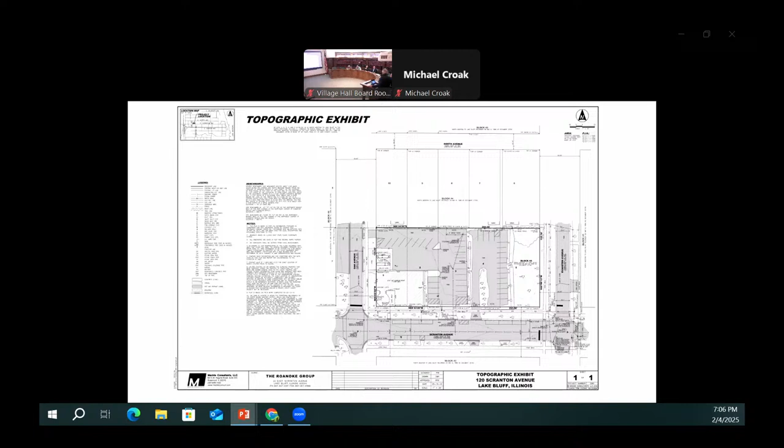Okay, all right, perfect. Thanks again for allowing us to present the project. We've got the comments back from our last meeting when we were together in the workshop, and I thought there was a lot of constructive things, and we really reviewed a lot of those ideas and incorporated most of them into the plans. We also went back in front of the Plan Commission and spent a fair amount of time on the site, in terms of logistics of the car ramp, the pedestrian. This is the old plan, how the sidewalk works; we looked at numerous different options in terms of how that might change and increase the safety of it.

The last thing we've done is sent all the information to Teska, and they're reviewing the knuckle at the corner, which may get modified slightly because it doesn't line up with the other knuckle on the west side. You can see those two don't align. So this is what we have at the moment. We're going to wait for the recommendations from Teska and probably incorporate those into the design.

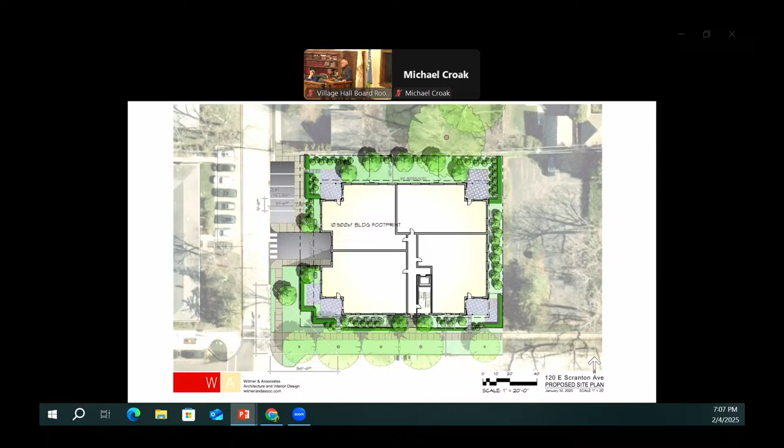The landscape plan has been refined in terms of the corners and some of the sight lines coming out of the ramp, making sure there aren't barriers to sight, and how pedestrians cross at the crossing toward the road. Then basically landscaping the corners and the privacy of the outdoor spaces from the individual units, incorporating those areas on the four corners.

We're going to try to keep the parkway trees that are there. They're in great locations and in pretty good shape. All the other trees are really not in great shape, and there aren't many of them. If they do get damaged during construction, we will replace them with additional trees.

You can go to the next slide. This is just a landscape plan which calls out all the species of all the plants around the project.

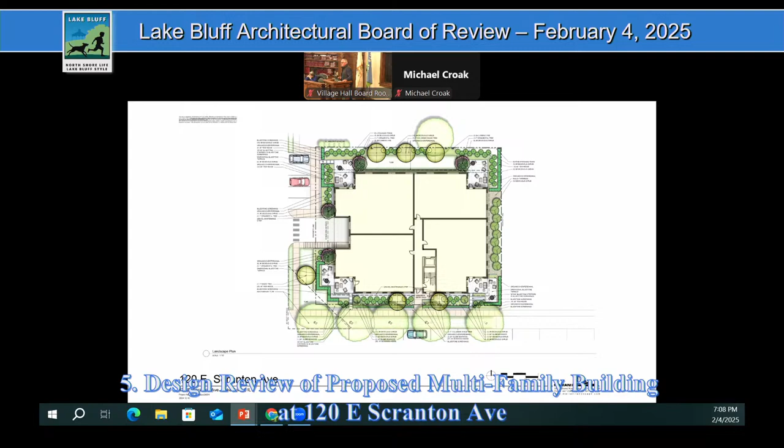The next slide. We have the option to have some at-grade generators, and two of the units are going to be at grade, on either side of the ramp. You can see on the right how the plan is and where their location would be, and they'd be screened with landscape. They would be for two of the units in the lower level. In the top floor, the generators would be hidden by the parapet on the roof. But we wanted to have that option just so we had locations for those. So that's what this shows.

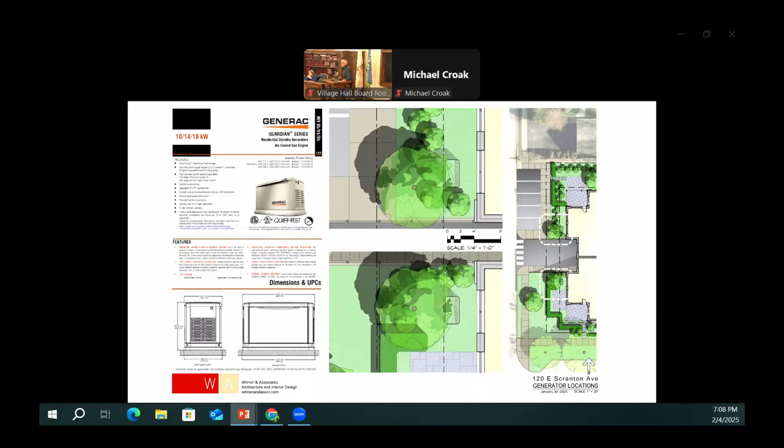The next slide. The floor plan really hasn't changed much. This is the basement spaces, and then the first floor units, of which there are four, with the corner porches. You can go to the next slide.

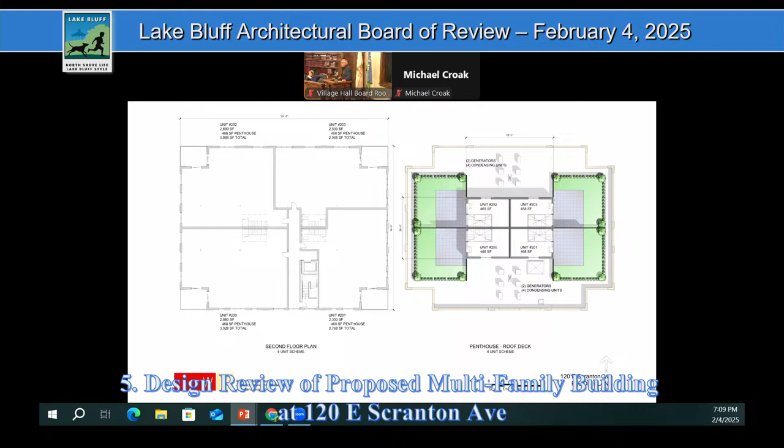And then the upper units, four units, with the upper penthouses to access the outside space on the roof, on the four different units on the second floor.

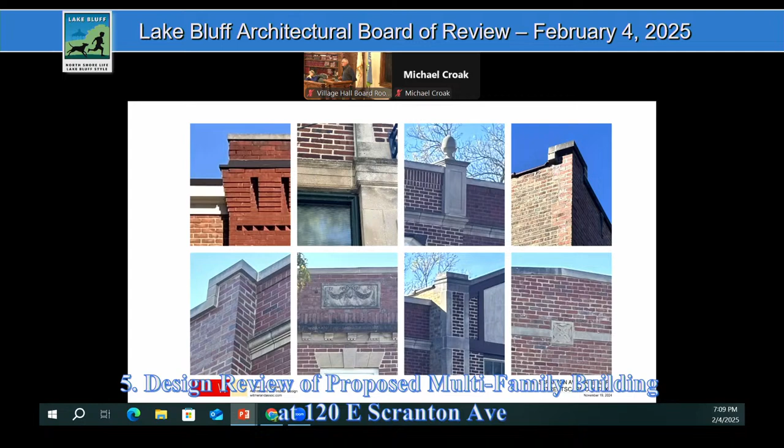Again, this is just the same slide that we had. Really, our detailing looked at buildings in Lake Bluff and other buildings of the same vintage for its detailing. So what we did here was show what we had and then showed where we are now. The three or four images above are what we originally presented, and what we're proposing is down below.

So you can see the cornice has a soldier course and then another rowlock underneath it, relieved at the top edge of the building to give a little more detail. We talked about the piers being pulled out. You can see the heads of the windows have been enlarged to 1.5 bricks high to give them a better scale.

The porches, we can talk about this a little bit. We had some discussion about screening in the porches, and what really came to light is that it's a really important element to people buying these units, the screened-in piece of it, as it has been historically in Lake Bluff. So we'd like to keep the screened-in porches.

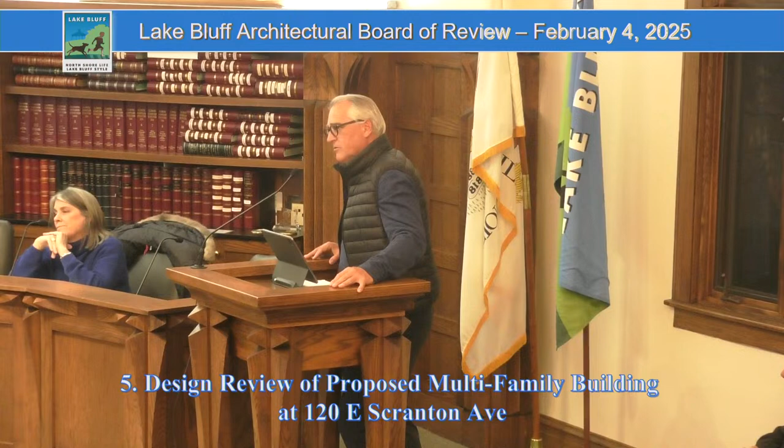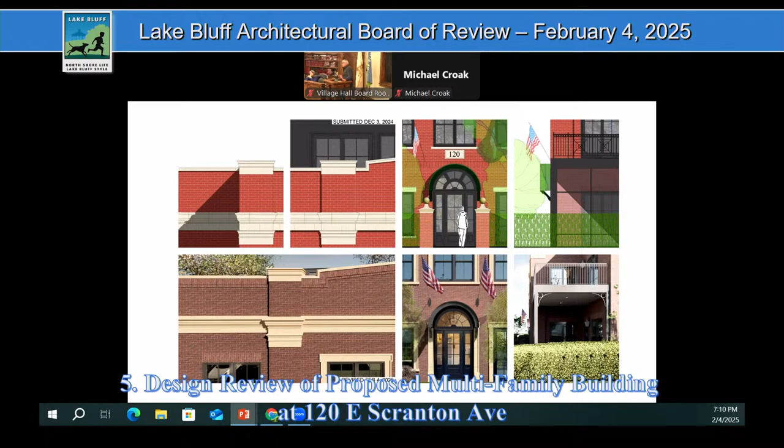We've added the details of the bracketing at the corners of the posts, which would stay on the outside with the screens going on the inside. We looked at different options in terms of retractability. Really, one issue is they're very large, and two, getting them tight and up and down. So we really feel like we'd like to have a copper screen, divided. I'll show you another picture. We can go to the next level.

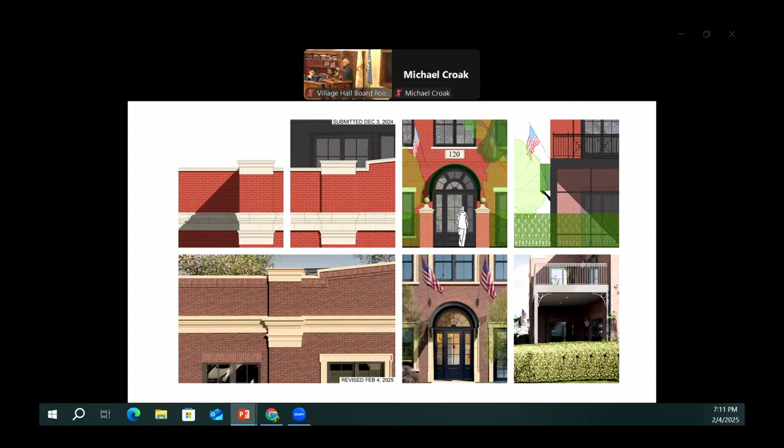One of the things we keep showing is American flags in front of the building. Our thought is that would be for 4th of July, Memorial Day, those sorts of things, so they wouldn't be permanent, just a place to put them. I think that's appropriate, because if we had them permanent, they'd need to be lighted, which creates a whole bunch of issues with lighting up interior space that we didn't think made much sense.

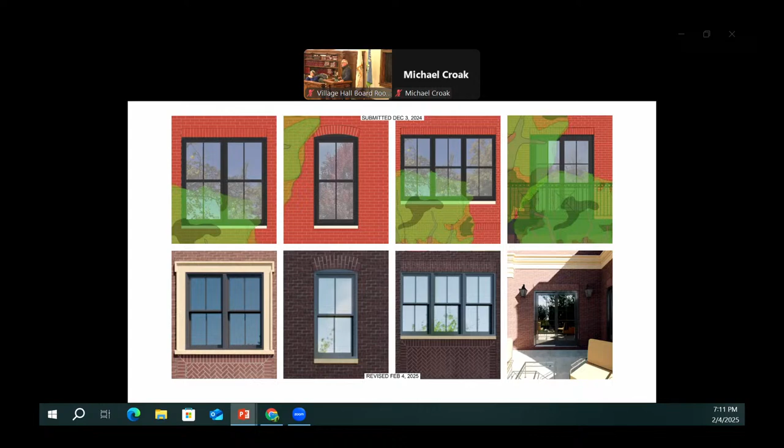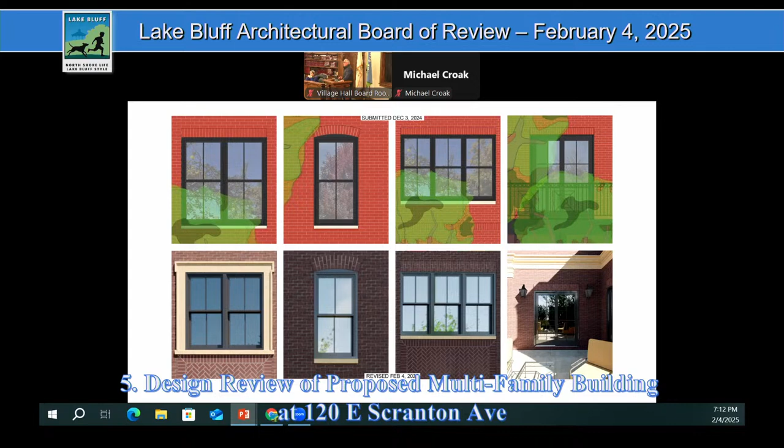This slide shows the window detailing, the enlarging of the brick details in some of the windows, and the center bays really having the limestone go around on all sides of the window, as you can see on the left slide. Below the window, we have a herringbone pattern that lines up below, and you can see those in the two different examples there.

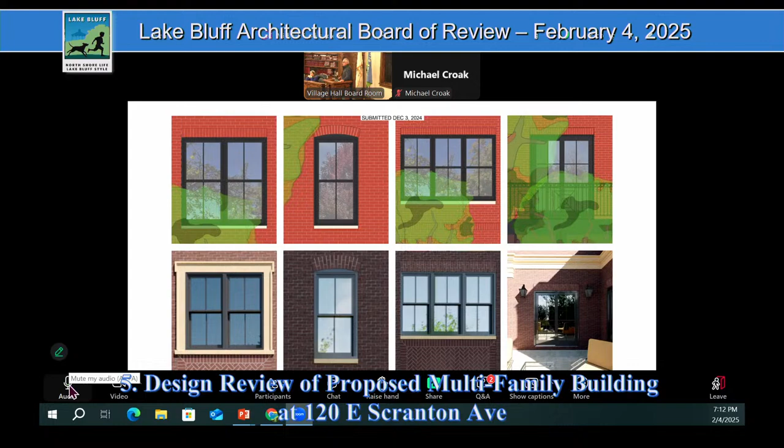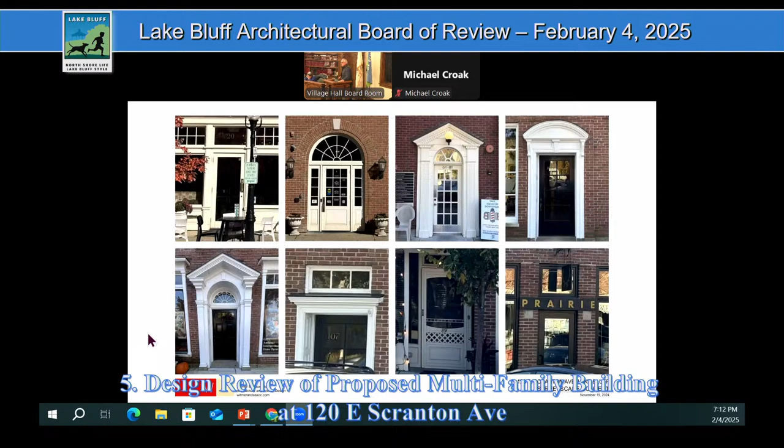And then the porch, you can see the coach lights, and we have those in the lighting. I'll show you the samples of the coach lights that we have on the exterior porches in the lighting plan. This is just one to show the examples of around town that we were really looking at and drawing from, and again, the entrance sequence and the idea of the detailing of that.

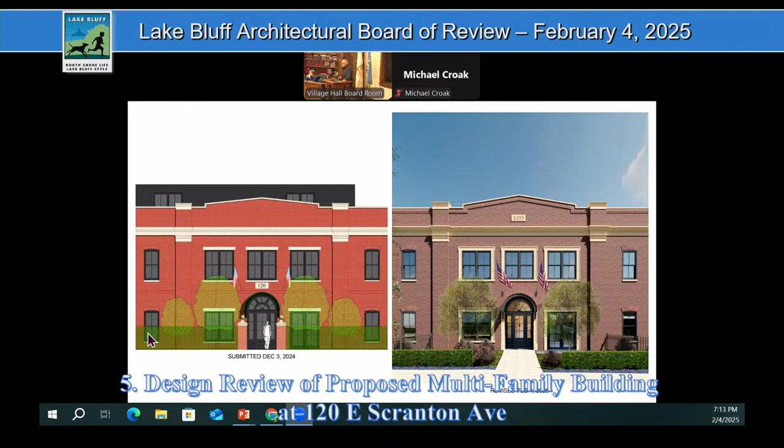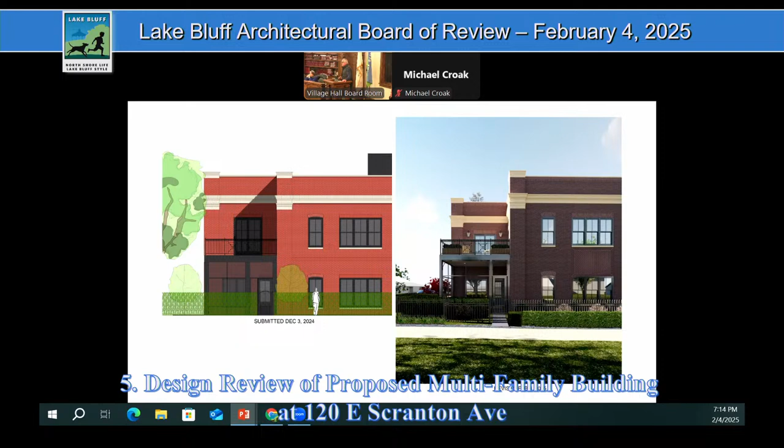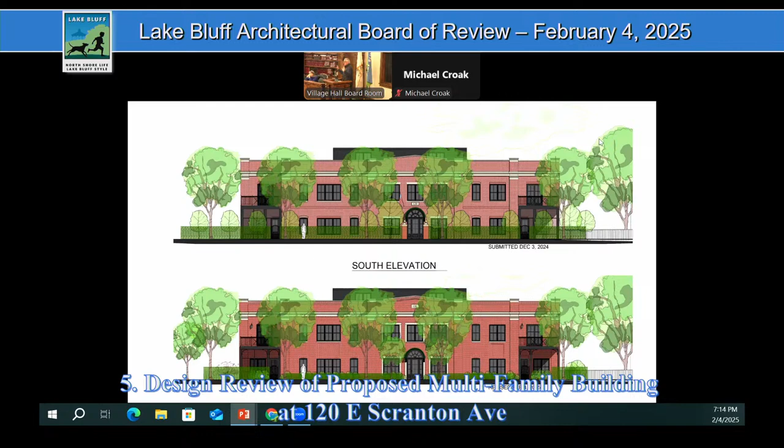Next one. So then elevations, the front elevation — this is the entire elevation so you can see it is all one piece. You can see how the center portion is now bumped out, with the limestone detail, or cast stone detailing, around the windows, and then the edges. You can see the panels of brick underneath the two sides with a herringbone pattern, the details around that, and then the cornice heads. It's hard to pick, so I showed the details first, and then you can see these elevations, because you really lose it at this scale. It's hard to see, but I think you get the appreciation. I think it was brought up before that when you're on that sidewalk, you're close enough to see those details, so you really will pick those up, which would be important.

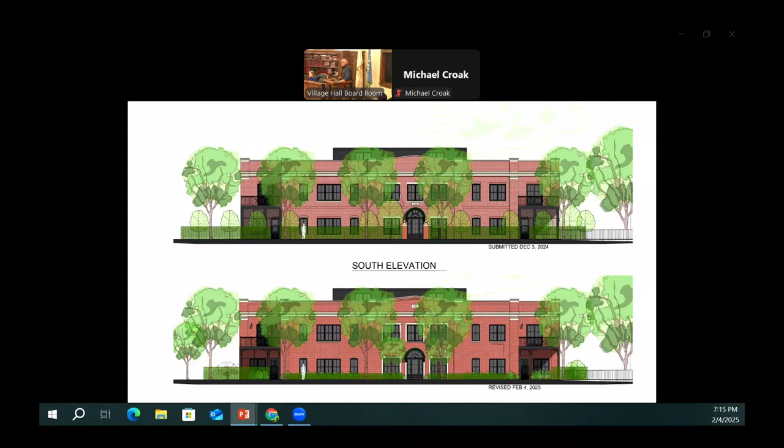Drew, could you check with Tim in the back? I'm getting a message from our Zoom people that the audio is off. Okay, great, thank you. Sorry — should I start over? No, I think you're good. Okay, that's all right, happy to. So we can get to the next one. That's the south elevation. Oops, I clicked on the wrong thing. I guess I'm not — there we go.

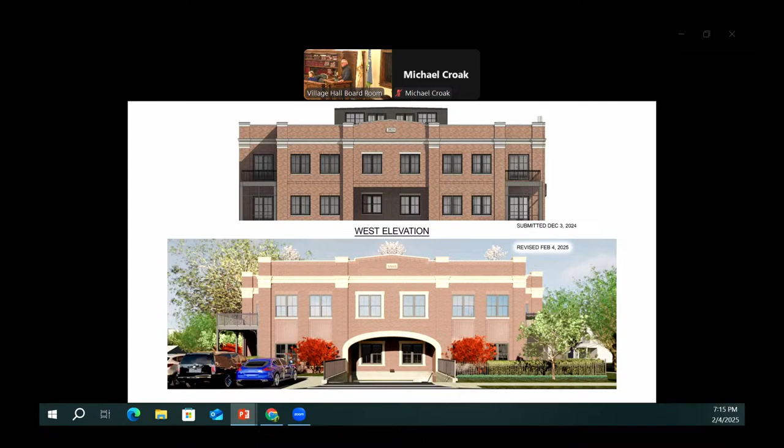All right, so this is the west elevation. I thought the comment about trying to arch and basically have cast stone going around the entrance into the lower level really made a big difference in terms of how that looks. I thought that was a really big improvement.

Again, in the center bay, we have the stone surrounds around the windows. This just shows how the parking works, and the sidewalks and railings, which come out and make people walk out and slow down, and bikes slow down going across that. We did study the ramp quite a bit ourselves, looking at it. We've done this in 5 other buildings that we've done in Lake Forest in a similar kind of situation.

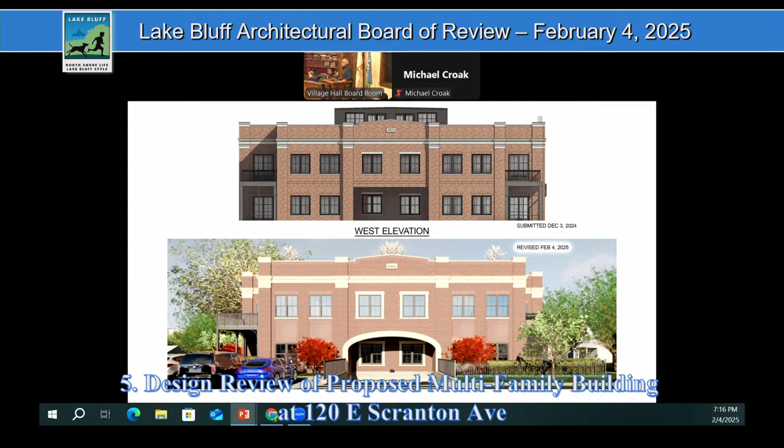This is relatively common in Highland Park, with a fair amount of underground garages and residential that's similar. This would be the first building like this in Lake Bluff, but it's pretty common elsewhere. The slopes are similar to what we have in Lake Forest, so we're pretty familiar with how that would work.

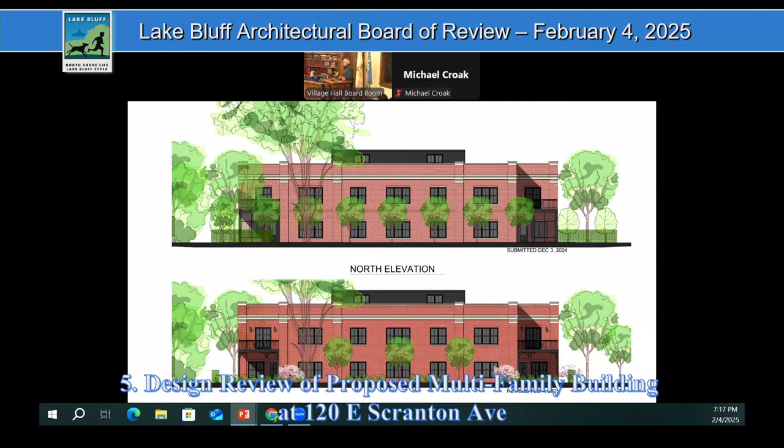On the north elevation, it's pretty much the same all the way around. The only thing I don't think is correct is the light fixtures that shine on the upper terraces, because they're clear. We have a different light fixture we're using on the roof, which doesn't show the bulb, so it's hidden and wouldn't project into the neighbors to the north or to the east.

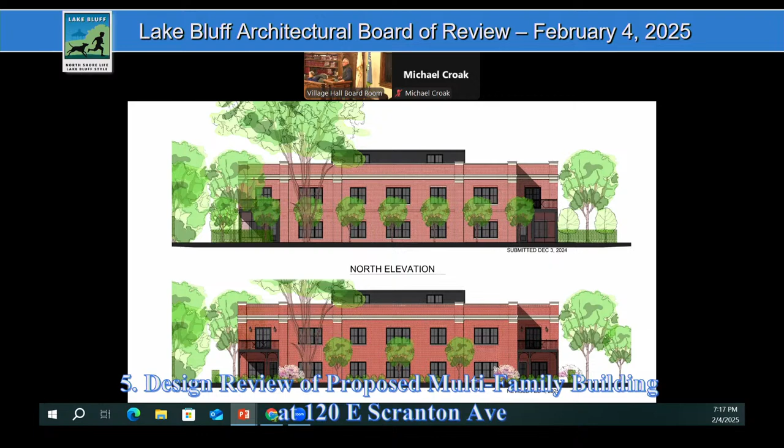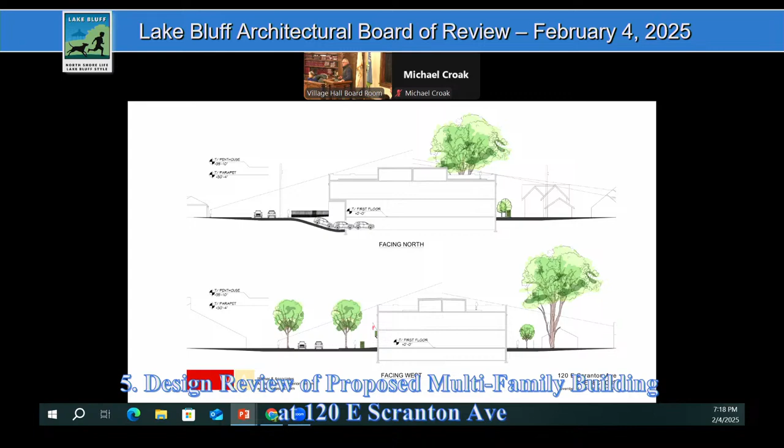This is the same as we have; we haven't really changed our section in terms of building heights. I want to show you that the penthouses are really inconceivable, or invisible, from the street, with the view being cut off. And this shows how the ramp works, how we get through that.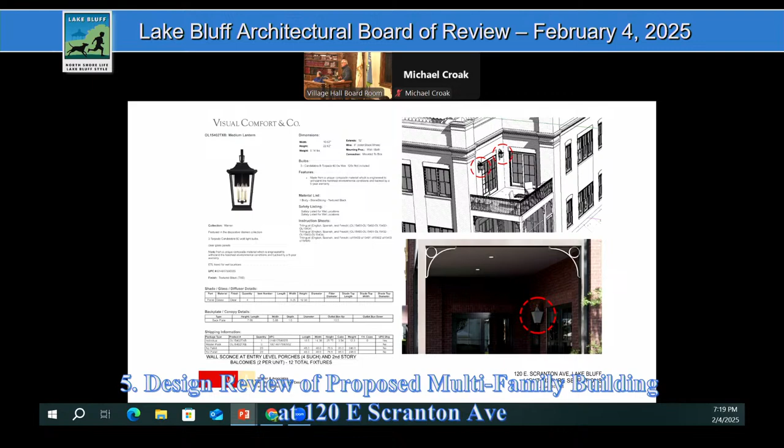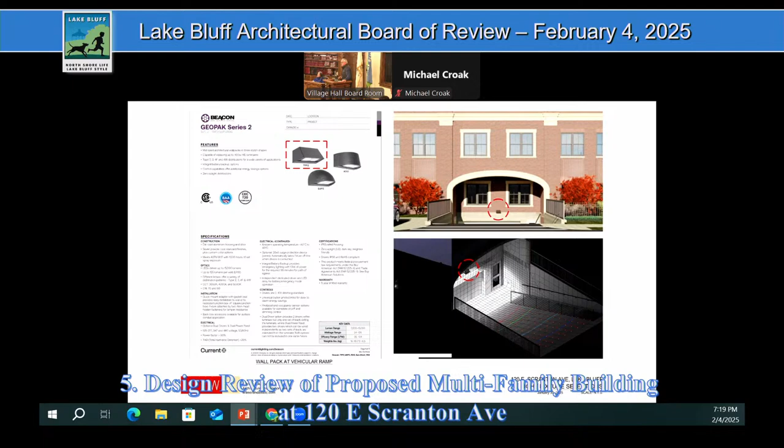This is very direct—we're concerned not just about spill down to the ramp, but also about the two windows above, which will most likely be bedrooms in the units themselves. So we're really concerned about light spread there, and this shows how it shines down at the ramp. That's a more generic looking fixture. Then we have some recessed cans to light up the entrance and over the porches, just to give a bit more light for safety when negotiating the front door and inside the porches.

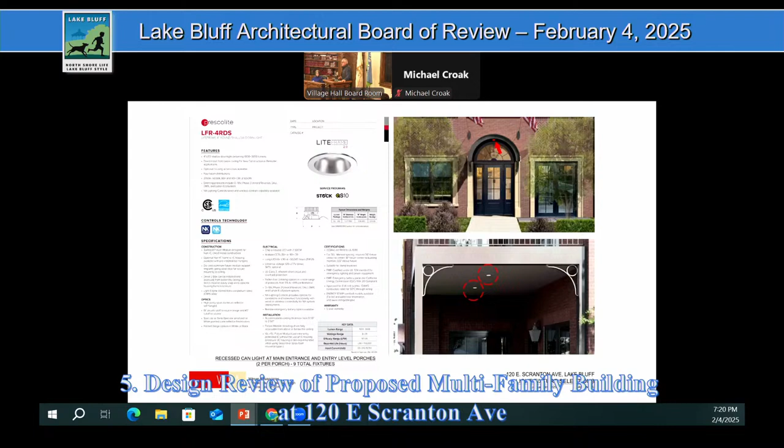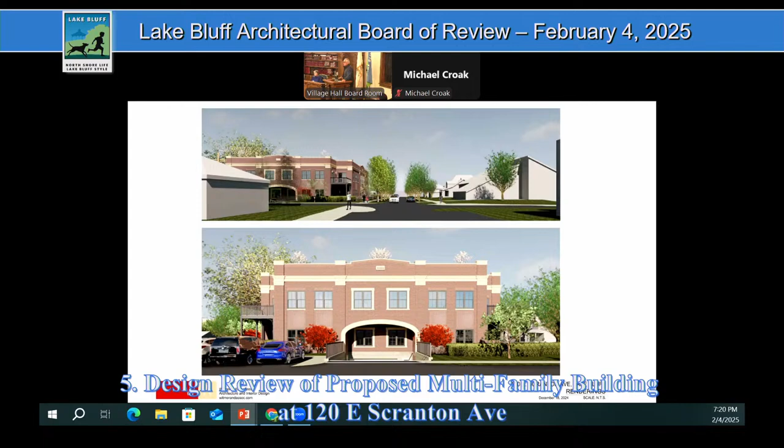These are some additional perspectives from the corner. I think there might be one more—this is actually an earlier rendering. We didn't have the landscape yet, but I thought it was good to give a visual on that. Then the last slide we have is materials.

The first one is, what do they call it, midnight soot—Hardie board, smooth-sided. That will be on the penthouses. I wasn't able to get a sample; they couldn't get it to me in time, it's supposed to be here tomorrow unfortunately. But I think everyone knows what Hardie board looks like, it's basically a dark piece.

I missed that—there's one on this side, that's for the penthouses, the window clad. We talked about having a, trying to get a not-black window.

And we were able to find what we liked for that, which is called midnight bronze, which is just a little off black. But I think it gives a little depth, which is a little different.

You know, this is not probably a great place to see color, but you can pass that around. And then I have two other samples, which is our face brick, which we have a hand molded looking brick, red, and then our cast stone, which would be like stone details around the building, which is really the limestone color for that. So those are the two.

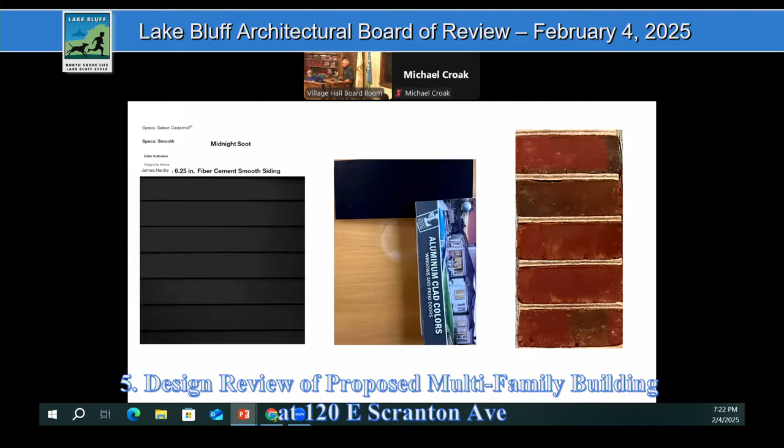I think that's it for my presentation. Happy to answer any questions, or? Oh, you think? Absolutely. Let's start with you.

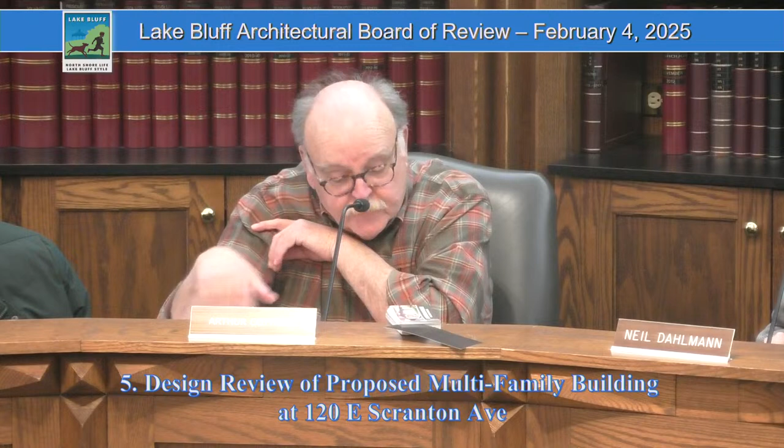A couple of things - I think what you're showing us now looks better than what you showed us previously in terms of the detailing and so forth. Basically, I have three concerns. I still feel that this is kind of out of character, if the idea is to be a transition from downtown to the residential properties, this falls short.

But having said that, the driveway down is really quite large. I mean it's two-way traffic plus the man door. Could it not be just vehicles and not pedestrian? In other words, move the emergency exit somewhere else, or that would make it 4 foot less in width?

The issue is where would it go? Well, if you look at it, then you'd have an area well, and it really needs to be on that end, so it would take up a fair amount of landscape on that space. Well, effectively, you could just move it slightly to the south.

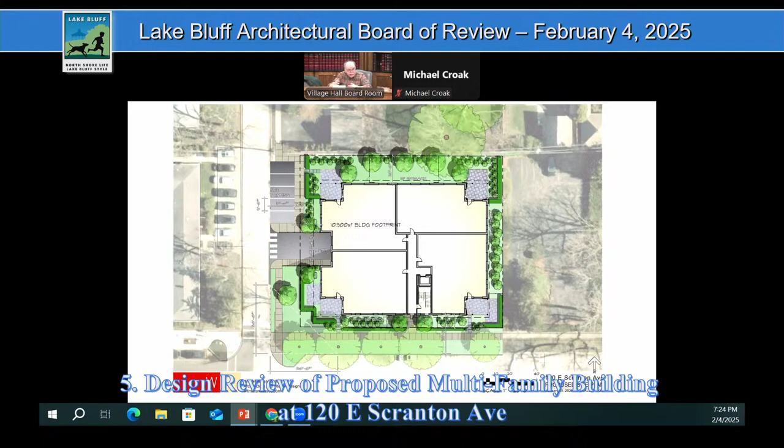In other words, you're going to have a wall on the garage, and you could have just enough soil for a planting bed, and then the stairwell. That would be one thought immediately comes to my mind. It's a pretty decent run. So that stair, if you look at it, let's see, let me pull up.

Can you pull up the basement plan? Let's just look at that a second. Sure. Because it's tight to get it in with - it's the landscape plan. There we go.

Right, but - basically, if I could interrupt you. Sure. Basically, what I'm saying is, you take the stair you have designed, move it, say, 36 inches south, so that on each side of the stair you have a wall, and it's separated from the door. Therefore, that archway and so forth can just go over the driveway and doesn't have to include the space for the man door.

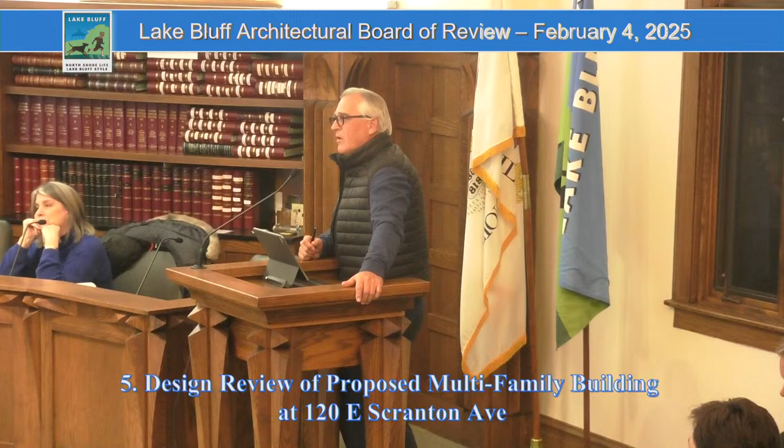I'm just wondering if that would look better. I'm happy to look at that, and I understand where you're coming from, and I hate to have that hold up the whole thing, but it's a little tricky because the arch has to be in the center of the building.

The whole arch, because it's such a symmetrical elevation - I understand, so that we'll have to move that around, and I just have to see the headroom of where that arch is. Wouldn't the overhead door want to be centered on the parking?

It isn't the parking - yeah, no, that's what I'm saying. All that has to stay centered, so we want to come in both sides equal. Actually, we have a little play with the door location. At any rate, that would be one thought - somehow make it smaller.

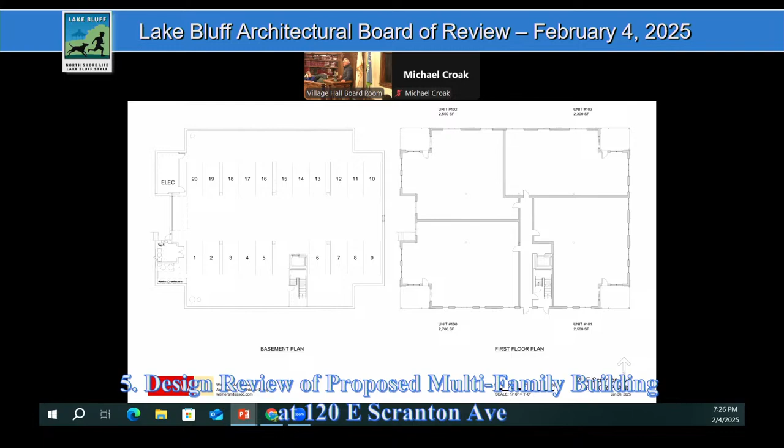And I'm making an assumption that you feel you've got to have two-way traffic. You know, that would be another possible solution, and it is really tight to be two-way, but what we found is, one, it's safer. Most people drive down the center of it and go up and down that way. And when somebody's coming - I live in the building in McKinley, so I drive it every day.

And I've driven it for 4 years, so I have a pretty good feeling for what people do. When somebody comes out of the top and the garage door is open, obviously somebody's coming out, you stop and let that person go. But you can be going by each other at the top edge, so you kind of have to keep it that wide, just to be safe, is what we've found.

Then the other question I had is just the overall height of the building. Now, you had a slide up there that showed - but in our packet and so forth, there's no indication of actually from grade to the top of the parapet. On that, yeah, and then that, let me just pull that up.

So, from grade to the parapet is 35 foot 4 inches. And then to the top of the penthouse is 35.10.

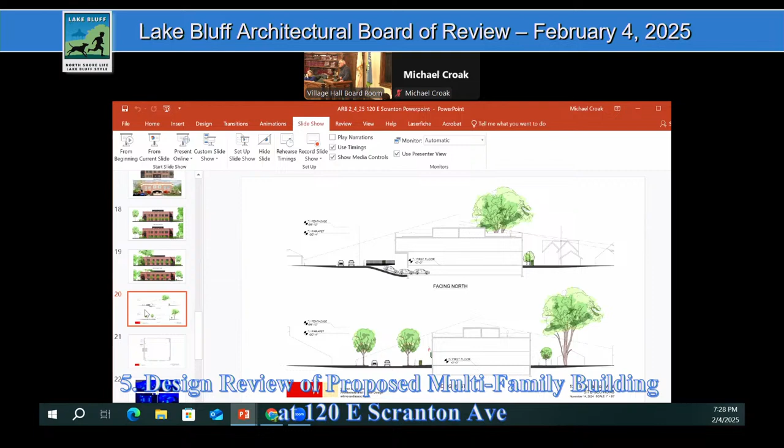If I understood what you said at the previous meeting, it's just the penthouse that you're seeking a height variation for? No, the 4 inches is a variation too, because it's 35 feet. So the variations that we got through the Planning Commission Zoning Board of Appeals has also included the 4 inches of the parapet. You'd say, well, why do you need the 4 inches? Well, it's the difference of having a 9-foot ceiling in your space underneath all the ductwork and everything, or an 8-foot ceiling.

It was a pretty big difference. And, you know, because we're occupying the roof, the parapet extends above the roof deck, doesn't it? Yeah, but it's our guardrail, so that has to be 3 foot 4 inches high for a guardrail. Right, but you could put a guardrail, I'm looking at the roof plan. And you put a guardrail around that paving you've got up there. We had some discussions with... okay, but let me finish my point.

Let me think. How tall are the buildings on the south side of Scranton? Does anybody know? On the south side, the library? No, the buildings that you're showing, this is where we're taking our design cues from. Those buildings, how tall are they? They're pretty, I don't know. We didn't measure them. You're talking about the Bluffington building.

Because the one across the street, or is it the Lawrence Interiors one, or any of those? The same building, right. My only thought is that the building gets built and you're standing on the corner and you look at that building and then turn around and look at Bluffington's and say, God, that building is a lot taller than Bluffington's. I'm just wondering whether it would be or not. I don't think it's probably any taller. Well, that's just my guess.

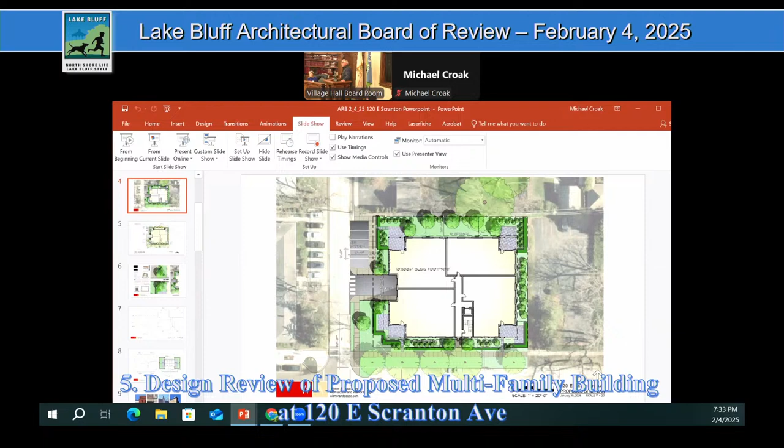So we try to customize those outdoor spaces because they're really important to people, and that's one of the really nice things about the project. If we had someone who absolutely wanted a sidewalk, we could have the flexibility. I think it makes the most sense for it to come out to the west as opposed to coming out to Scranton, to the south.

The other question I had on the site plan, maybe this is in the basement, is where's the trash dumpster? The trash dumpsters are in the basement in a trash storage area. It works better than I would have thought. They back the trash truck down the ramp, pull it out and flip it in, and they have recycling.

In some of the buildings we have a bigger dumpster. In other ones that are smaller, we just have individual trash cans on rollers that come out, because with so few units there's not a ton of it. But the trash is inside for that.

I'm looking at the garage plan, and I'm wondering, are you planning on electric car chargers? There's two things with that now. The insurance people limit the electric chargers in a condominium building to a trickle charge. You can't have a supercharger. We do have circuits for 110 outlets for all the electric cars, but we can't put in a 240 charger because of insurance.

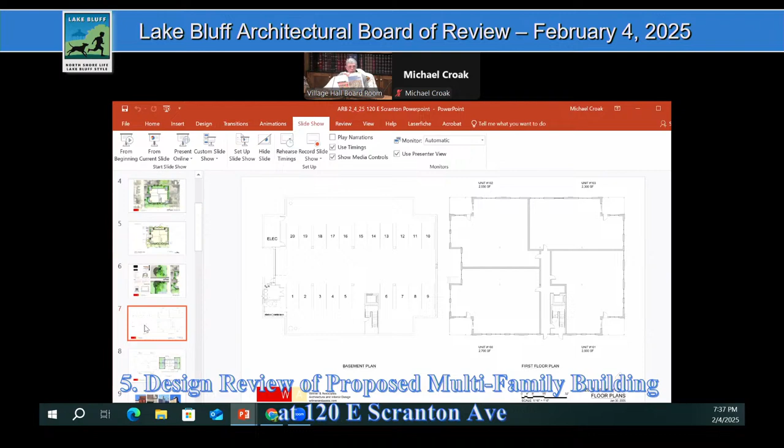I'm looking at this drawing, and I like that brick color, which is not quite that one. It's closer than the red. Yes, it's a lot closer. Let me see what else I had. Same thing on the brick color.

I think that's pretty well all I had. Most of my comments are geared towards this since we used to have a company that managed condominiums, so I'm familiar with some of these issues that come up. That's why I'm looking at some of the details we've had problems with on buildings. It's been helpful that we've now done five or six buildings, and one's been operating, I've been living there, so that helps because people aren't really too shy about complaining about different things we could do better.

For the most part, it's been pretty good. The landscaping between the sidewalk edge and the boxwood or yews, having enough space to put granite shavings so the salt goes there. In Regents Row we planted 4 different ground covers and grass, just because it's too harsh an environment for something to grow. Learning about that, I think it's been good because we've always learned something.

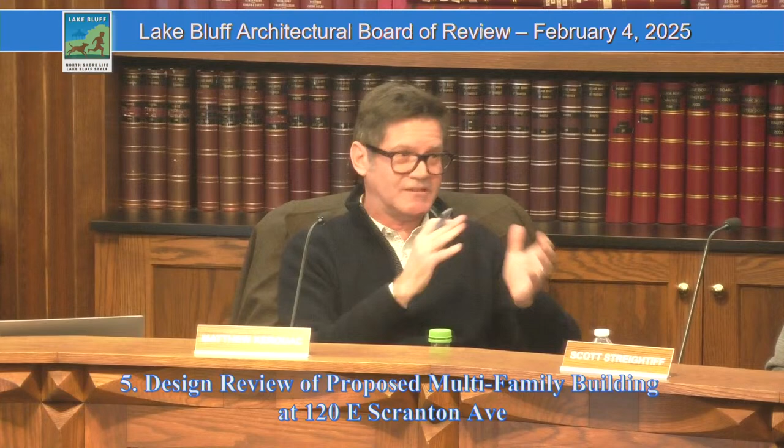It just feels like it's missing. If they were like cast stone wrap columns and this cool stone kind of balustrades and all that, I think that's one thing, like a nice big statement, but they're very kind of, I find them kind of weak statements for such an important corner of the building. I get the carve out to kind of open up, but then you fill it with something I think doesn't have the same level of integrity as the rest of the building.

And then I know you're trying to break up the run of windows and kind of that articulation by doing a little bit different brickwork. You have like an arch lintel, then a straight, and then you ended up doing like a picture frame with a herringbone. Again, if we could maybe bring that more instead of just applying a couple little decorative things to kind of make up for just this long run of brick.

And even the way the sills kind of just terminate at the ends of the window instead of articulating a little bit more beyond, just give it some level of, it just feels very severe for, if you see all those other details in these little buildings as we look at them, there's a lot of detail for these little buildings, and you have little detail for a big building.

And it's my concern that in 3 years from now we may feel that we missed an opportunity to make an amazing statement for Lake Bluff, instead of one that I feel doesn't quite get there. And if it's a budget issue, I can't fight budgets, and I know you can't fight budgets, and I know that's a main driver. If it's an aesthetical choice, then that's my kind of reply to the aesthetics, and that's subjective, and that's just wanted to state my piece.

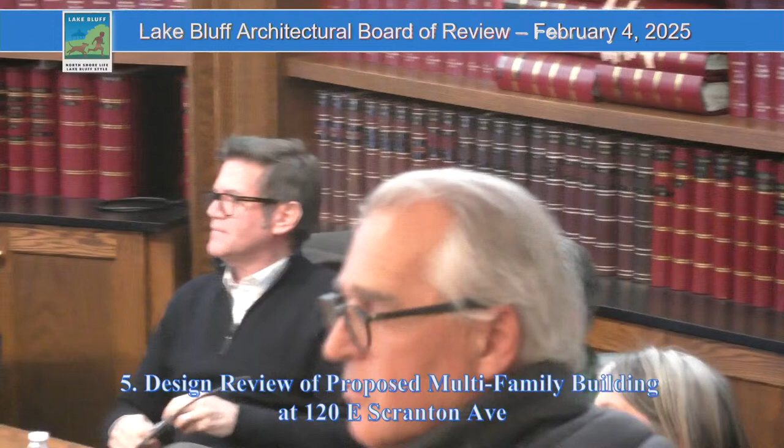Mike, can you show that up on the screen? Sure, the porches, yep.

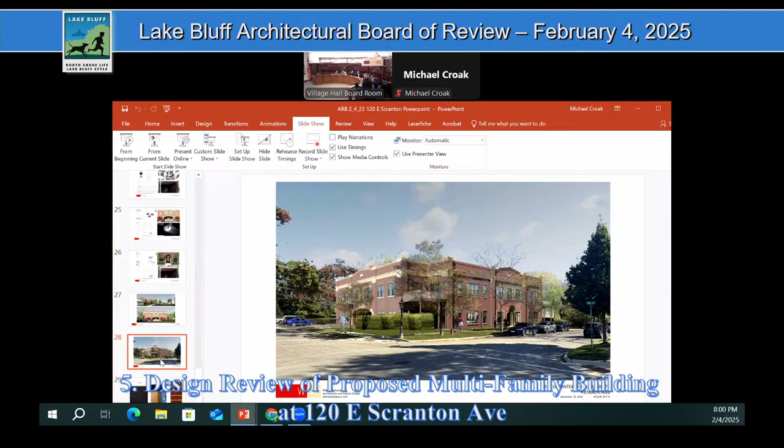The southwest porch is what everybody's going to see. The other thing is maybe that's an opportunity to make it a little more screened, because I know you're doing it with the landscaping, but those 3D renders might show that sidewalk. I feel like people sitting out there might feel exposed, though the landscaping really helps—when you're on that porch sitting down, you won't be able to see the street. But this landscaping is probably not as accurate as the other ones. The idea is that you're pretty private off of that. We have that same sort of relationship in McKinley too, where you have a pretty high hedgerow that screens the spaces below.

I don't know, I just think the idea of maybe exploring a couple different options for those corners would be worth it. And I don't think the stone idea was bad either. I love the idea of making even creating that darker statement—it's always great, because it might blend away a little bit but still capture something. I'm sure you'll find something great.

The stone is not only initially expensive, so we're going to trade the one arch for one porch. But I mean, I think the money is well spent at the front door. And kind of historically, that makes sense to me—people put ornate things around their front door, more expensive materials, and show off that.

So would it be wrong to do the front two porches more blown out and the two back porches more simple? Or would people be like, no way, we don't want the bad porch, you know what I mean?

I'd like to come up with a solution because there's really three of them - the two on the west elevation are pretty prominent. So you've got three, then you have one. Why would you do just one bad one? I'd like a solution that economically makes sense and is consistent, because there's something nice about the building being relatively consistent on all elevations, since you see it pretty prominently from all different sides.

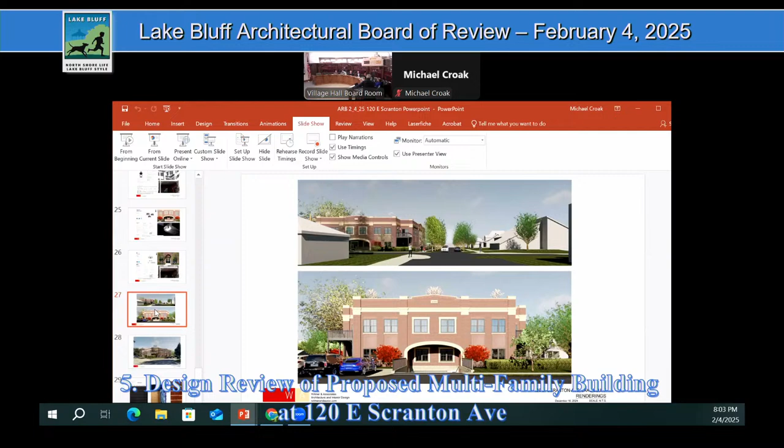Okay, and then secondly, is that front door locked or how does that work? My question was, does there need to be a vestibule? So when you go inside, there's actually a vestibule to get into the elevator beyond that. But more important, what about the mailman or Amazon person - where do they leave the packages? Inside the vestibule, inside the building. So they can open up that very first door?

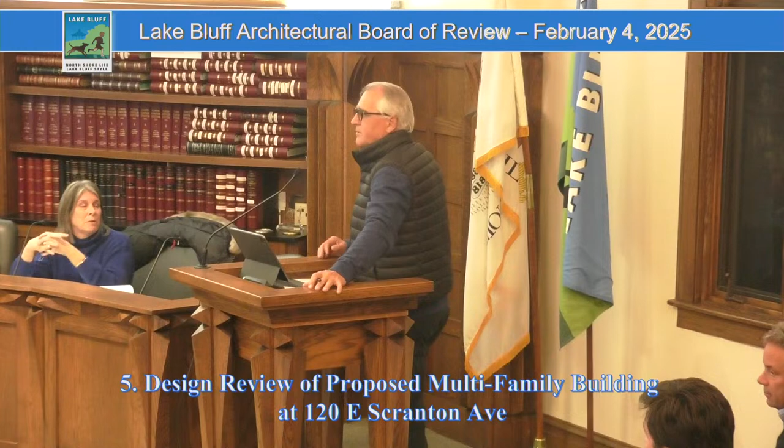Yeah, typically we have that on an electronic locking system. After 10 o'clock at night it locks on the outside, and you have a fob to get into that door, but at night it locks. Beyond that, when you get in there, you have a call system - you can call whoever it is and they buzz you in. We don't have it where the Amazon packages sit on the porch. I was imagining there'd be a stack of Amazon packages out on the sidewalk, but that doesn't happen - it's all inside.

The only other thing I was wondering about was, up on the roof, there's those generators and condenser units - are those loud, or how are the neighbors going to feel about that? The heat pump system is basically a compressor that runs outside, which now is really quiet, and the backup generators are now insulated and everything, so it's really more of an issue for the people when you're outside on the deck than it would be for the neighbors. The other thing is there's a solid parapet wall around that which hides it and also bounces the sound off.

So we really haven't had an issue with that. Your neighbor's condenser is way closer to you than this would be. And is it the same thing for the two on the street? Yeah, same thing - and those are emergency backup generators, so they're only going to run for 10 minutes on a test day, and then when the power's out. So nobody's going to complain about that? Again, they're next to the commercial space across the street, not residential.

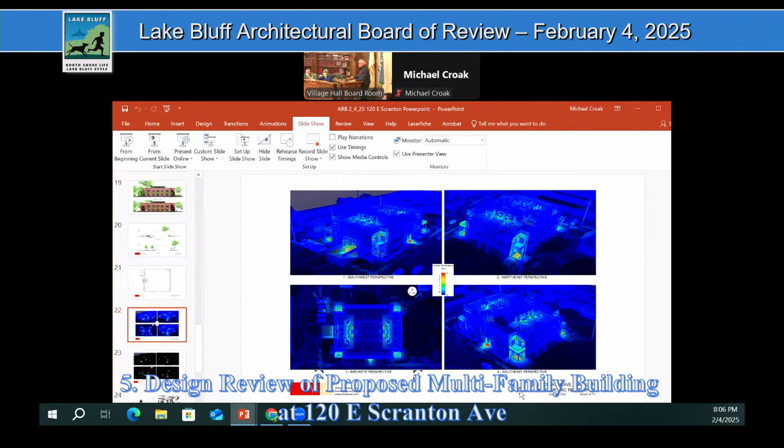What is the dimension to the top of the parapet wall? Do you have that? 30 foot 4 inches, or 30-something over feet, whatever the code says.

And what is the Bluffington's building height? It's pretty close, I don't want to say because I don't know, but it's got to be right up there. I mean, I don't think they're going to be - they're obviously different scale and different pieces, built at different times, but they are compatible.

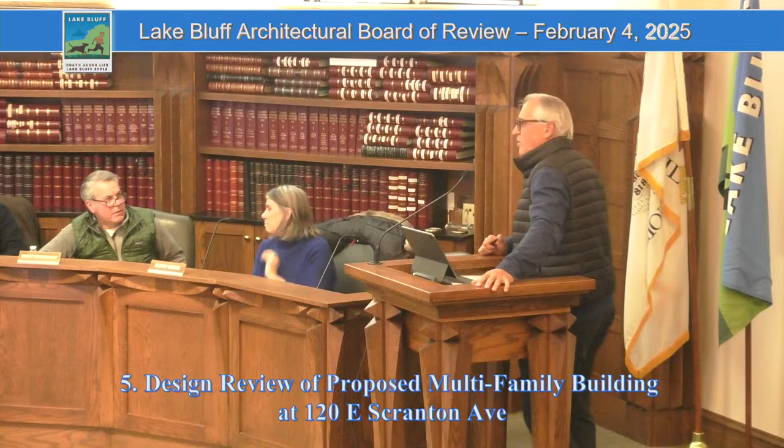You're going to have 10-foot ceilings? Yes, in most of the areas, but where our ductwork, sprinklers, and transfer sanitary are, we have 9 foot - that's our minimum. We have 8-foot doors, and that's really important to us. When you're spending this kind of money, it's important. I think that's why people say, oh, that's silly, you could take 4 inches out - well, you want your 4 inches inside the space, it's kind of a big deal. People say 9-foot ceilings but you have 8'8", doesn't sound so good.

You guys done? Well, I had one more thing. You've had a lot of work - she's Columboing him. I'm sorry, one more thing. Next time we let her go. All right, I think I am now finished. Okay, all right, it's my turn then.

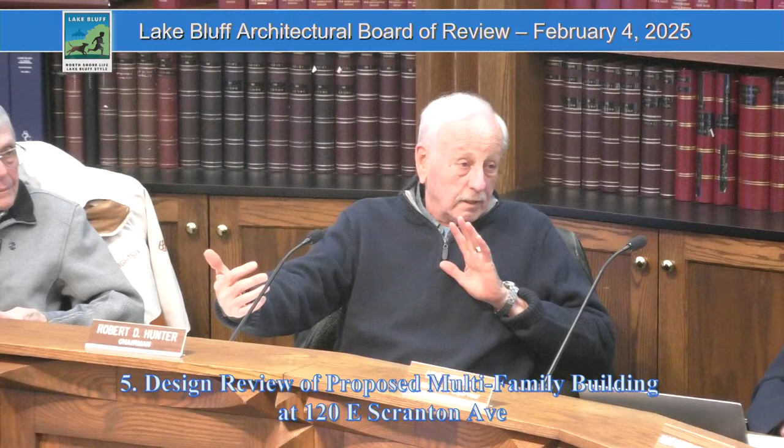Let me go back in time a little bit. First of all, we keep thinking of this, or you keep saying this is a transition piece - it's really not, the next piece is the transition piece. This is 110 or 115 feet, whatever that dimension is, till you get to Evanston, and whatever happens there is more of a transition than this is. When Peter was here the first time, the only time, you described this as more of a background building and not a statement building. And it's a little more of a statement now because of what we asked you to do.

Those are just kind of general comments. So there's a lot of talk about the arch in the drive, and yeah, that's a different geometry than any place else. Everybody's got some issues with it, and I'm looking at the drawing, and you've got the little roof thing going on all 4 sides. Maybe you do that, repeat that shape down there, just a thought, and do it out of brick. But then the bigger question is - can you show that, and Bob, could you explain that?

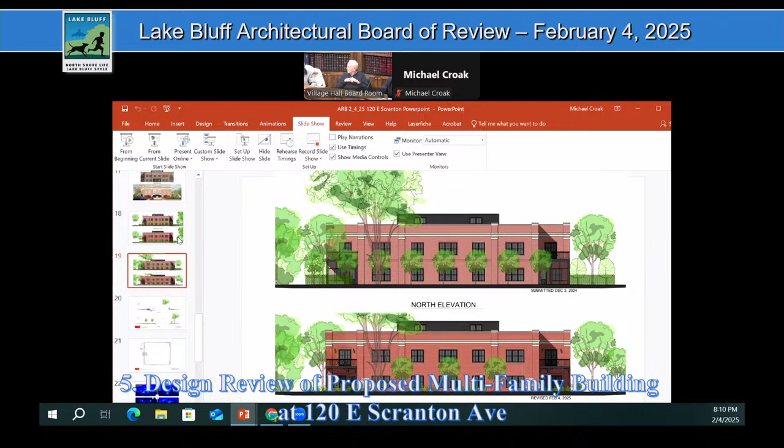Go back to that one, Mike - just the garage elevation. Yeah, I'm sorry, you don't have it on all 4 sides, just on 2, the shape on the very top parapet, right where it just raises up, and that's kind of an echo of one of the buildings. If you pick that shape up and just kind of did it again instead of the arch, only do it with brick rowlock and whatever, and get rid of the stone like everybody's talked about. My other question, though, relating to that, is it necessary to have a man door there at all?

For egress out of the basement, we need two ways out. And so if we don't do it there... we looked at having an area well out the back, but then you're coming out in the middle of the yards, and then you've got a snow plow issue and all that. Okay, that's enough, you're right.

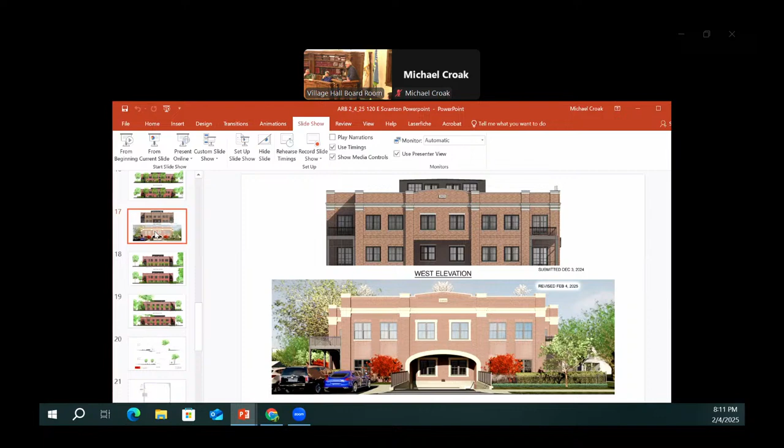The one thing I would look at too is, I don't know if I'd lose the arch shape. I think if it just wasn't stone, if it was just brick detail on the road, that'd be kind of a cool detail. Just not the stone, because the stone makes it might as well be neon.

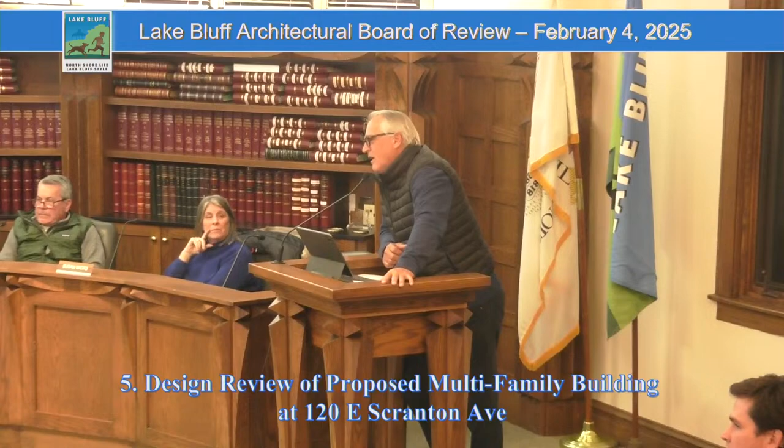And that idea of, we can't slip it in between the two pilasters, if it were to get narrower, like Art was talking about, and we could get it within those two pilasters, then it would integrate better. It's just like it didn't fit. Right, and it didn't fit.

But we're responding to a board of people telling us what to do, so I think we have to look at it again. I'm not sure, but we'd definitely look at having it like a pediment underneath, though I'm not sure how that'd work - it'd be like an inverse pediment, and that might be kind of peculiar. But the idea of having the arch span, historically it makes sense, it's working, it's doing something. So that's kind of where I was going with that, but we'll study it and look at it and see what makes sense. If we can meet next week.

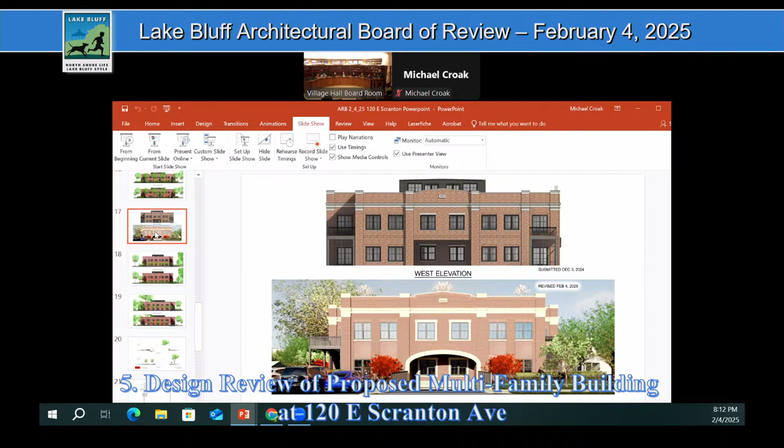One last quick question, if I could, Bob, if you're finished - I don't mean to interrupt. Go ahead.

What I want to go back and say is that the brick detailing you've done, which we asked you to do, is very important. I'm remembering - I know you've been to Cranbrook - and you walk by Eliel Saarinen's, I think it's the common building of the dining hall, and he's playing with brick. He's got to be giggling when he's doing it, because he goes from miniature brick to big brick to different patterns.

Well, the one thing I think is, you know, a bunch of comments like it's our old school. Well, yeah, it is, because those were 1920s buildings built basically in the same style and with the same idea that we were doing. So Gorton Center - Gorton is sort of the school, right? So I do think it fits in.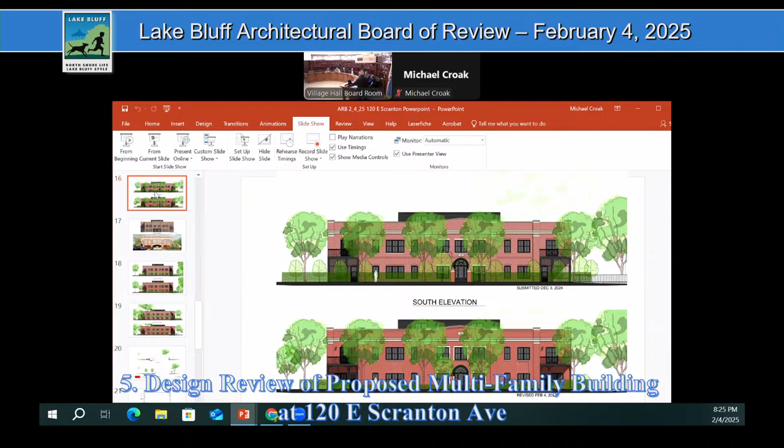Well, you pretty well said the motion, so moved. Okay, Neil made the motion. I second. Neil's ad hoc motion on, you made all the motions today. Yeah, I'm in a motion mode. Okay, so roll call.

Member Wicks, aye. Member Stradiff, aye. Member Fairwex, aye. Member Dahlman, aye. Member Cottrell, aye. And Chair Hunter, aye. Okay, motion passes.

Thank you, Pete. Yeah, thanks. We're thankful for everybody's excitement. No comments, I appreciate it. It's gonna be great, it's gonna be great.

Okay, now if we want to tackle the letter. Yeah, okay. I was a little bit confused about exactly what it was talking about.

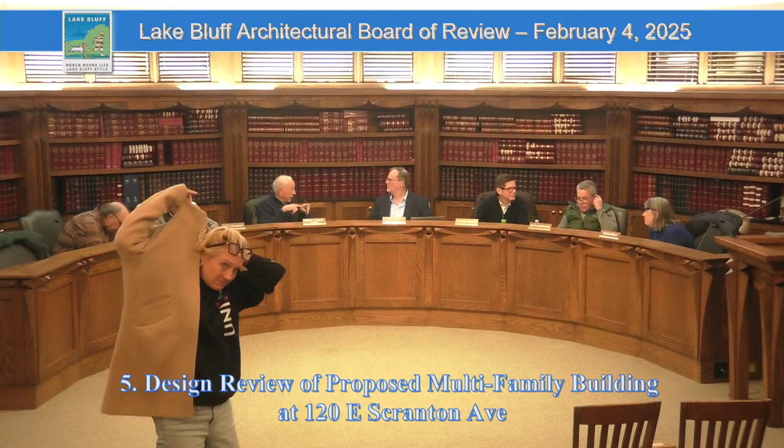I don't know if you had a conversation with him. No, I didn't, I didn't really talk to him except for the back and forth email. Right, I thought that was pretty well done, both us and him.

Do we know what the rendering, what did she say, hang on a minute, she's talking about a survey. Was there? You know, my only thought was that maybe she was talking about the different comp plan discussions or something like that. And we've also talked about missing middle housing, not for this specific site, but for other areas around downtown. There's definitely been some communications about missing middle or comp plans or something like that, maybe that's what she's talking about.

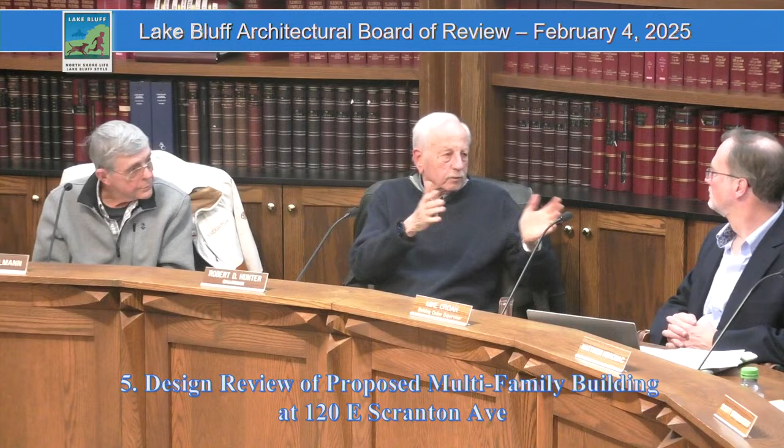Yeah, but I don't know if it was a formal board thing downstairs about the missing middle. And what you do at Block 3, missing middle, it really had nothing to do with affordable housing, it was the kind of housing we don't have much of anymore. Right, what there was is being torn down, so. You know, it's Armor Woods. But I thought one thought was, could be Block 3 if you made the numbers work.

But making those $300,000 condos, which you just can't, it's just not tall enough to do that. I think that was the discussion at one point, and then everybody said there's just no way. Is there such a thing as a $300,000 condo?

Come to Kankakee, Kankakee, we have tons of them. If it's in a 40-year-old building, yeah, but there's not many brand new condos. All these new things you're seeing are rentals. Yeah, right, for sure, I understand, I also understand that as well.

But soon there will be condos. Well, there's one in Highland Park right across the street from my office that they're selling for 2 to 3 million, the penthouses are 5 million. They're sold out, they won't be occupied for about another 6 months. Is that the new contemporary one? They're all sold. That's not this the project we're talking about, is it? Optima, is it all sold? Not part, but the Optima ones down on Sheridan Road, Green Bay, all glass boxes, they're gone.

She says, number 3.3, the renderings in the packet are an absolute non-starter for us and are entirely different from, here's a question I have, from what was originally shown to us when this discussion started.

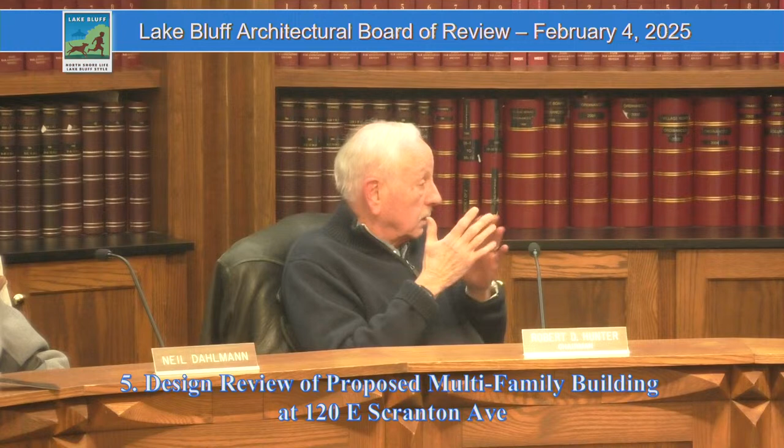And one of them was like remnants of an old factory that was really cool. So talk about a transition, and I don't remember the other 2. No, I thought she was referring to something entirely different.

Regarding that missing middle thing, there was a presentation right here in this room. They had all kinds of pictures all over the place, and they said take these markers and put this blue thing on something that you like. I think that's what she's referring to. I bet that could be too.

I don't know. Okay, so what do we... I feel like this person went through all the trouble to write this. What do we do in this case? Do we have to write back to her, or do we say we read your note and we considered it? I don't know.

No, we generally don't write back afterwards. I told her I would give everyone the comments, and everyone would read her comments. Okay, and that's really it. We consider it. Okay.

But I don't really understand what the comments refer to. Do you know what information you gave her that she thanks you for? I had sent her the link to our packet for tonight's meeting. Okay, so I wonder if it is about this.

She says that she doesn't like the building, based on what she sees. But then she starts bringing in these other issues, which are really outside the purview of the ARB anyway. Right, the building that Peter showed was the first thing that, in block form anyway, the PCZBA saw. It hasn't really altered much, other than the detail of what it is.